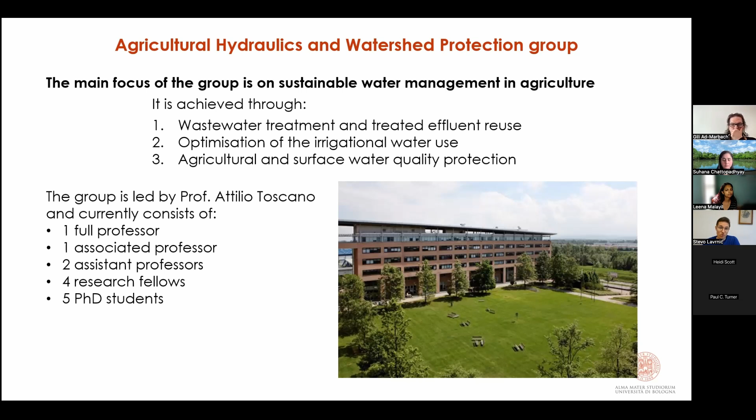So just a brief introduction of the group. We are the Agricultural Hydraulics and Watershed Protection Group. We have different areas that we are focusing on. We are working a lot on wastewater treatment, mostly through nature-based solutions, and reuse of treated effluent. We also deal with the optimization of irrigation water use, and finally water quality protection. The director of the group is Professor Attilio Toscano. It's not a big group, but it's a well-working one. I'm an assistant professor, and I'm working with Professor Toscano on basically most of the projects we have.

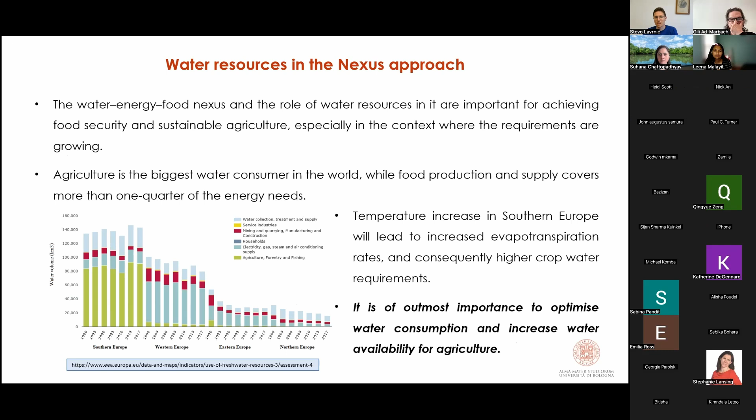Just a brief introduction of the Nexus concept in case you're not familiar with it. Lately, especially in the European Union, the European Commission is pushing a lot on considering the Nexus approach, considering different environmental components that have a role in the management of different areas. In agriculture, it's mostly the water, energy, food Nexus; lately we are adding also ecosystem components. Water, energy, food, and ecosystems are all very interconnected, and we cannot focus only on water or only on food without considering other components. This Nexus approach is crucial to achieve food security and sustainable agricultural production, especially where we have growing demands and low water availability.

We know that agriculture is the biggest consumer of water in the world. It's around 70% at the world level. In Italy, it's a bit lower, around 50%, but in the whole Mediterranean area, so south of Europe, North Africa, Middle East, the average percentage of water used for irrigation is around 80%. So it's quite a big portion.

This is very important in the context of climate change. The Mediterranean area is one of the hot spots for climate change. We have a big temperature increase, leading to increased water losses, mainly through evapotranspiration, and therefore high crop water requirements. We have to supply more water in an area where water is already a scarce resource, and it's becoming even scarcer with climate change. So it is of utmost importance to optimize water consumption and increase water resources available for agriculture.

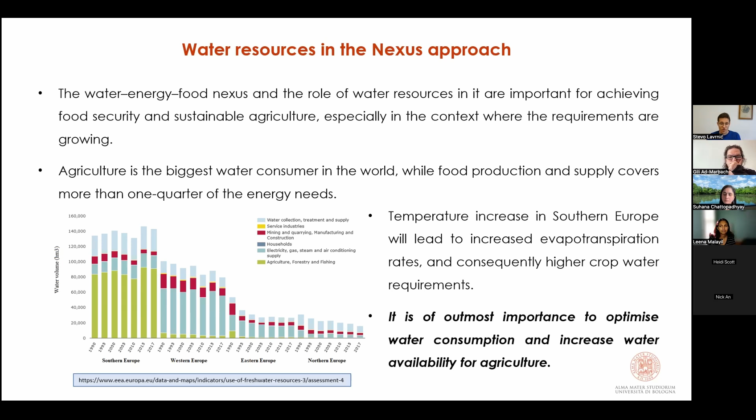In the last years, our group has been working on different areas of water management. We work on optimization and modeling of agricultural water resources, focusing mostly on precision irrigation and the estimation of water needs for agriculture. We have to change the concept. The concept now is to put water, and if we lose some water, it's okay. It's not okay, since we don't have water, so we have to estimate exactly the water requirements in different months of the year based on the crops we are growing. To reduce water consumption, we can also use precision irrigation, giving the crops exactly the amount they need at a given moment.

Since water resources are scarce, we can increase available water through reuse of treated wastewater. Treated wastewater is an important resource. It's available throughout the whole year, and it also has a big added value: the nutrients and different elements present in treated wastewater.

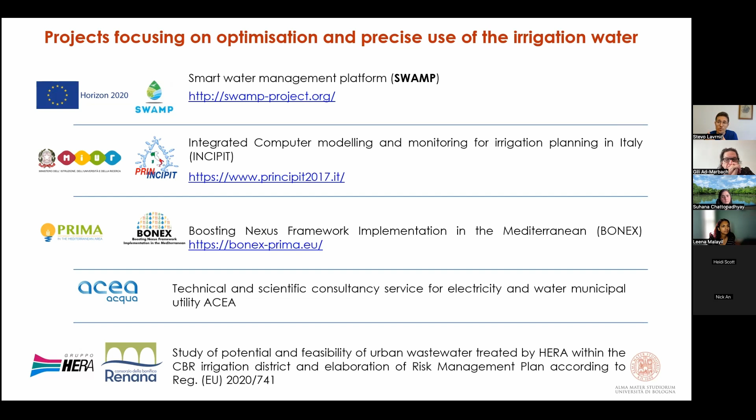So if we start with the first pillar, optimization of the use of irrigation water, as I said, we have to estimate well the amount of water that we will need for crop growing, and we need to reduce water use for agriculture. So one of the projects that is dealing with this topic is SWAMP, Smart Water Management Platform. It was a European project that ended 2 years ago, and it developed an Internet of Things platform that is doing smart water management for precision irrigation in agriculture.

What we did in this project, or what this platform was made to do, is to consider all the data that are important to estimate water requirements for crop production. So we took into consideration different data inputs. The weather is a really important aspect, since it gives us the idea of the rain or the temperature that are influencing water requirements. The platform is also considering soil moisture. That is again an important input in this context. So through all these data sets, the platform is calculating how much water needs to be distributed in different moments.

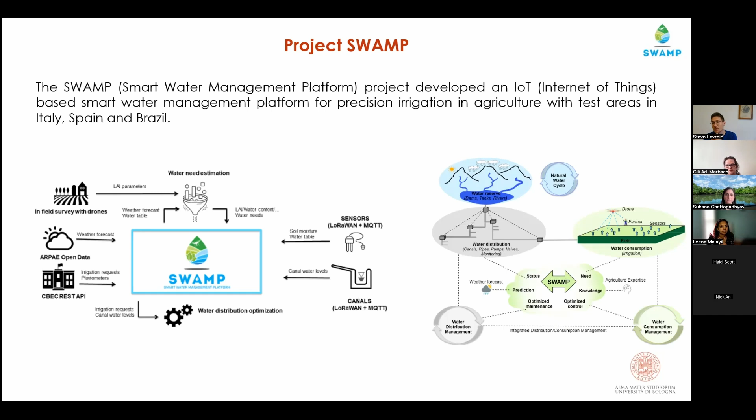The project focused on different test sites in different areas. In Italy, it was near Bologna, where we had a test site. Different sensors were installed to monitor soil moisture, to monitor weather conditions, and to test this platform in the study site.

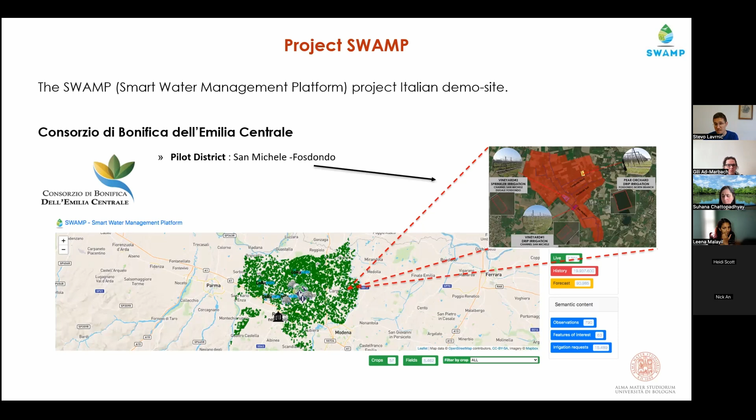Then we have another current project that is Bonex. It's a PRIMA project. PRIMA is a foundation that is focusing on the Mediterranean area. Italy is part of the Mediterranean, so we are working with this project. The focus, the objective of the Bonex project in Italy is to optimize irrigation district water balance in terms of quality and quantity. So we are trying to limit losses in the water distribution system.

So we have a network of surface channels that distribute water to the final users. And we have certain water losses in this distribution network. So we are trying to reduce these losses and to improve water use efficiency. Through reducing losses, we can also reduce freshwater abstraction from surface water bodies. So in the Bologna area, in Emilia-Romagna, that is a region of Italy where Bologna is located, we are taking water from the north of Italy, the Po River, and we have a 120 kilometers long canal that is taking water from the Po to these areas.

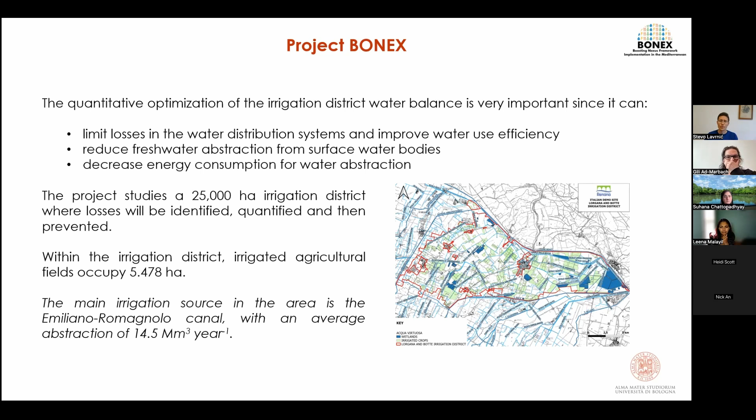So we have to reduce freshwater abstraction, and we have also energy consumption connected to this. We are in the plain, so we have to use pumps to distribute water in different areas, and the use of pumps, of course, consumes a lot of energy. So through reducing freshwater abstraction, through reducing water losses, we are also reducing the energy consumption. In the Bonex project, we are focusing on a 25,000 hectare irrigation district. So it's a big irrigation district where we are studying different aspects.

We are considering different areas of the optimization of water balance. So we are considering the water fluxes to and from the irrigation district. And as I said, we have different specific objectives. So one of them is to reduce losses through evaporation or infiltration from the surface water network, to decrease energy consumption, to assess the effect of nature-based solutions. So in these irrigation districts, we have different nature-based solutions and different wastewater treatment plants that discharge water into the surface water network.

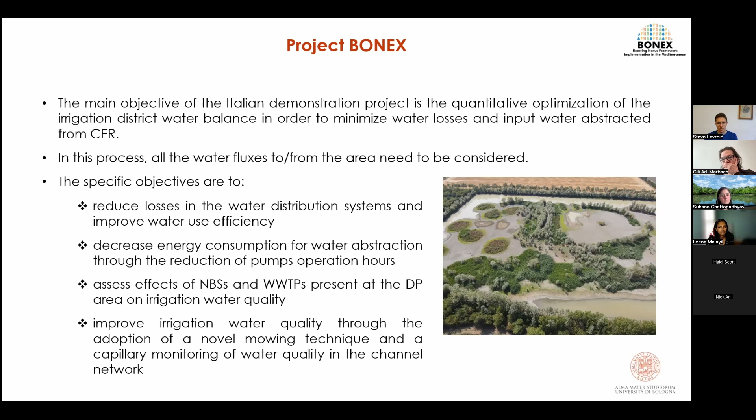And we wanted to assess the effect that these nature-based solutions can have on water quality improvement, and also how treated wastewater discharge influences the irrigation water quality. And we are also considering a novel mowing technique to improve water quality. So basically, we are trying to reduce the rate at which the riparian buffer is being harvested to increase its role for water quality improvement. This is the district that we are focusing on. So as I said, it's almost 25,000 hectares.

In this irrigation water district, we have different water inputs. We have surface water inputs, but we also have, as I said, different wastewater treatment plants that discharge water into the surface water network. So we have indirect water use, but we also have different outputs. Well, to be precise, we have one output from the district.

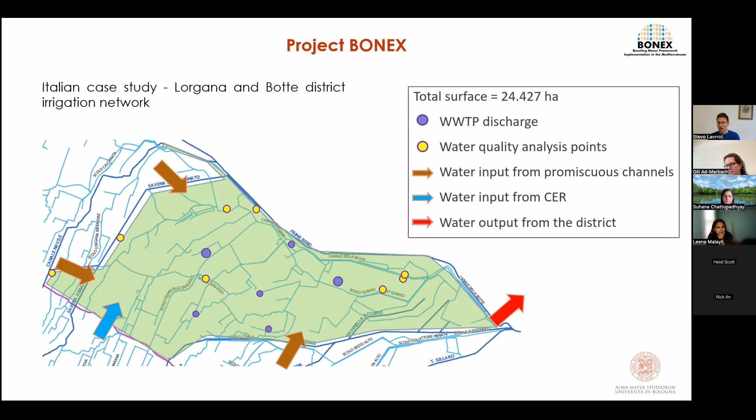If we are considering water balance of the irrigation district, then of course we have to consider different components. So we have to focus on losses through evaporation and infiltration, but then we have to consider also precipitation as an input. We have to consider input from the surface water bodies. We have to consider inflow from wastewater treatment plants. We have to consider irrigation water output.

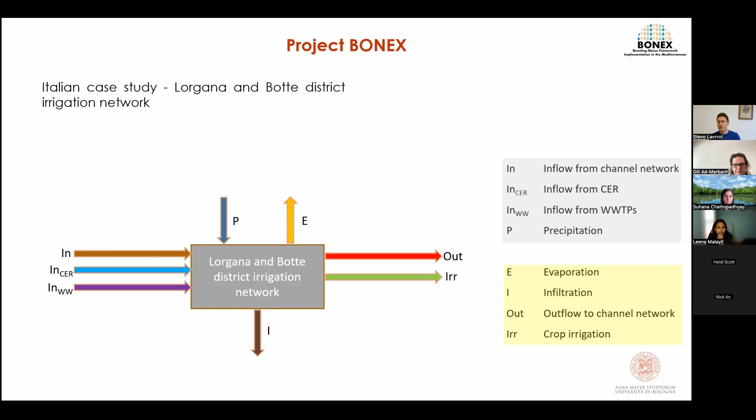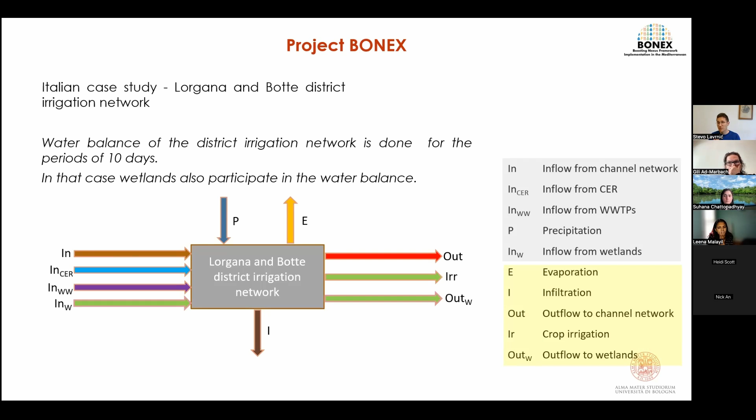And what is curious about this irrigation district is that we have a lot of wetlands. A lot of wetlands that can contribute to improving water quality, but they also consume water. So to be able to close the water balance of the irrigation network, we have to consider all these components.

In the same irrigation district, we are currently doing a study of potential and feasibility for urban wastewater reuse. So we are trying to evaluate what kind of potential treated wastewater has for satisfying irrigation water requirements. So we are assessing different wastewater plants from different points of view. And we are also developing a risk management plan for the treated wastewater reuse.

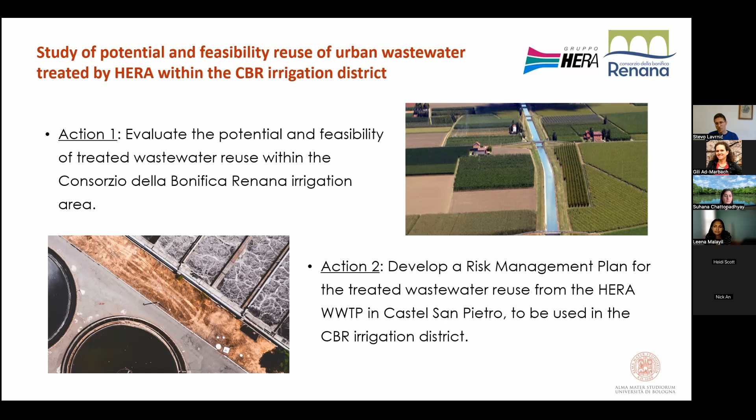I'm not sure if you're aware of that, but in 2020, the European Parliament adopted the new wastewater reuse guidelines. So that is giving clear instructions on how to conduct water reuse in different areas and what kind of minimum quality treated wastewater needs to have to be able to reuse it in agriculture. One of the specific requirements of this European regulation is also to develop a risk management plan for each area where we do water reuse. So we are also doing that in this irrigation district.

This is a bigger area, so 140,000 hectares, of which 90,000 hectares can be irrigated. In this area, we have 31 wastewater treatment plants of different size, of course, that were selected based on their point of discharge, so if they're discharging water inside or near the irrigation district, and we also considered the wastewater treatment plants with a capacity higher than 2,000 population equivalents.

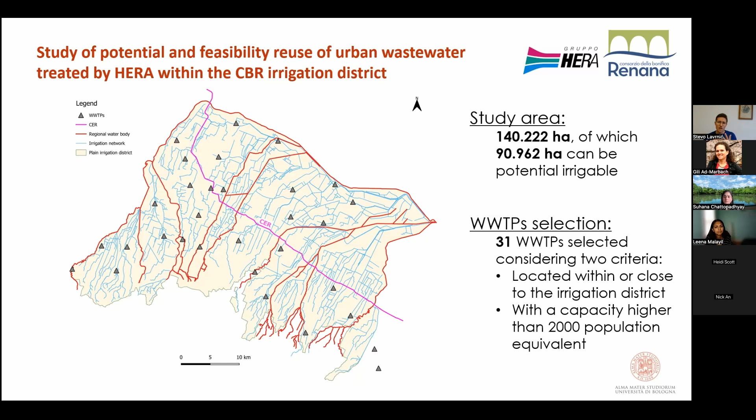So in this area, we have well more than 31 wastewater treatment plants, but some of them are really small, around 1,500 population equivalents. That is, you will agree, really low water volume, so we are not considering them in this study. And we also have some wastewater treatment plants that are currently discharging water outside of the irrigation district, so we are also not considering them. This was the first step of the analysis.

We also evaluated how much this treated wastewater can contribute to irrigation water requirements. And we also classified the treatment plants that are suitable for water reuse. Suitable meaning that it is discharging water near the irrigated areas, suitable in terms of volume, as I said, and especially suitable in terms of treated effluent quality. These treatment plants are working in different ways, so they have different qualities of the effluent.

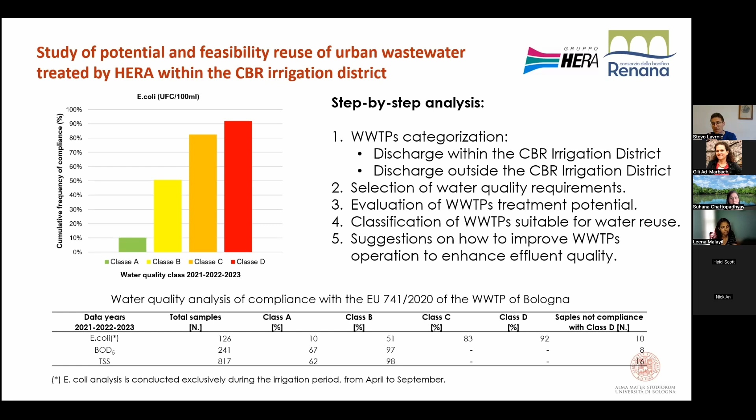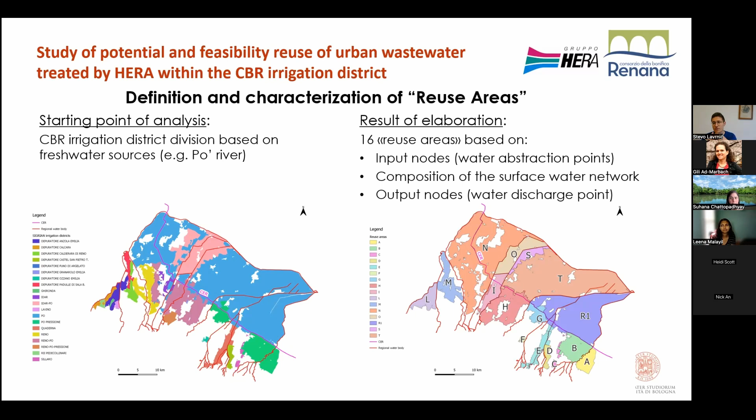According to the new European regulation, we have four classes of treated wastewater. Class A is the best, Class D is the worst, but all of them can be used to irrigate certain crops. In these 140,000 hectares, we defined different reuse areas. In the end, we defined 16 reuse areas that were defined based on their input nodes. So where the water abstraction point is, what is the composition of the surface water network, so how long is it, how well distributed is it, and also where is water discharged from these reuse areas.

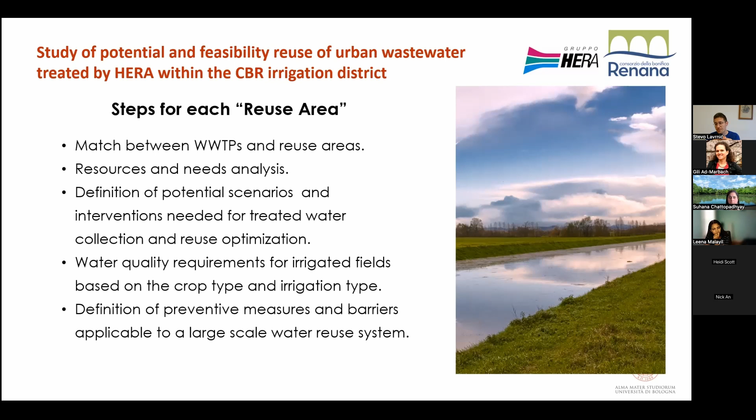Once we defined these reuse areas, we tried to match wastewater treatment plant effluent quality and the requirements of the reuse area. Based on that, we did different potential scenarios. So, for example, we have a wastewater treatment plant that is discharging effluent in the C class, but our reuse area crops need B quality. So how can we match the requirements and the available resources? And we also defined different protective measures and barriers that can be used to increase safety of treated wastewater use.

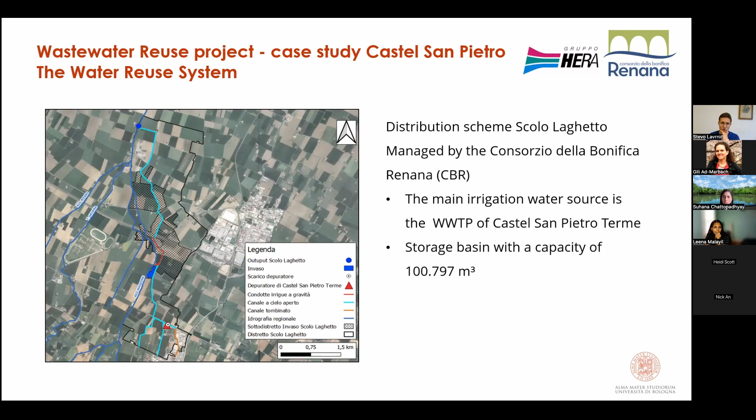We did the risk management plan, as I said, for one of these reuse areas. The particular point of interest for this reuse area is that we have a storage basin. So we also try to see how this storage basin can affect water quality. This is the risk exposure and risk management plan. It's in Italian, I'm sorry, but I will explain it to you.

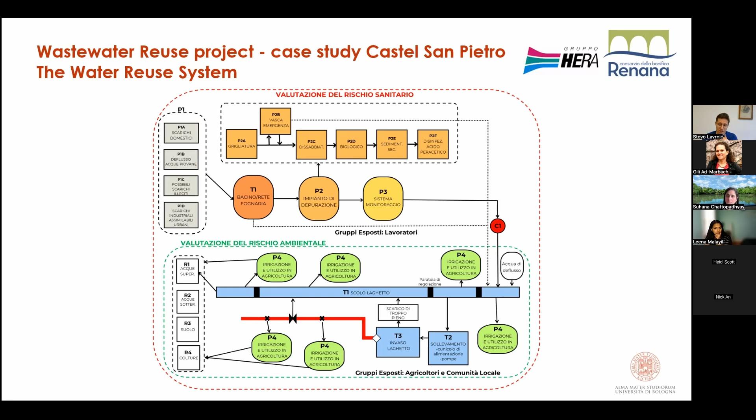So we have different environmental and human health risks. When we consider human risk, we have to be aware of the workers that are working in this area and that can be in contact with treated wastewater. The farmers are of course one of the potential affected groups, but we also have to consider the local community, so bypassers, or the workers that are dealing with water distribution. So we have to consider different areas, different ways they can be exposed, and how their health can be affected.

Also, in this area, we associated water quality class with the needs of irrigated fields. We did the study from 2019 to 2023, and we have data for all these 5 irrigation seasons. So for each season, we studied the surface that was irrigated and what kind of crops were irrigated. Based on the crops that were irrigated, we concluded what kind of treated wastewater quality was necessary to eventually irrigate these crops with treated wastewater.

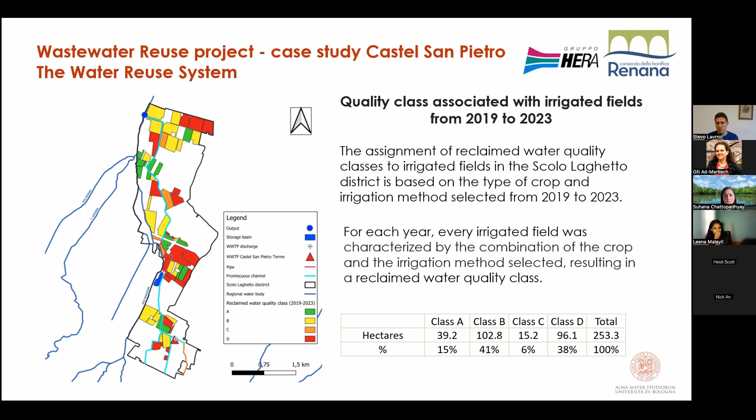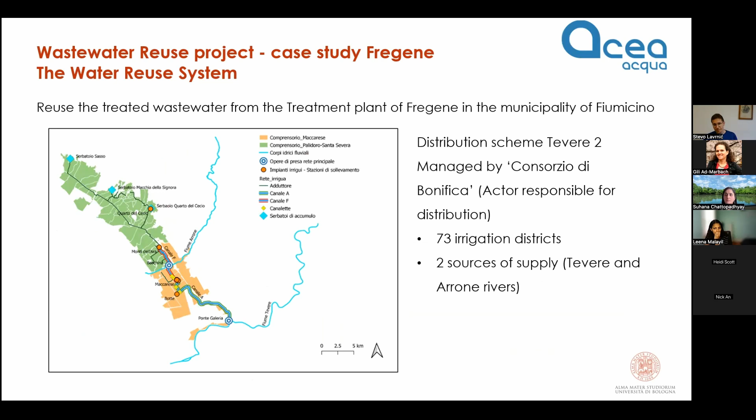We also did risk assessment for a much bigger area. This is near Rome, where we have in total 73 irrigation districts and 2 sources of supply, 2 rivers that were Tevere and Arrone. This is the scheme of the irrigation district where we did this risk assessment.

We have a wastewater treatment plant that is producing treated wastewater. We have different channels that are used to distribute this water, and then we also have different storage basins where this water can be eventually stored and then used afterwards.

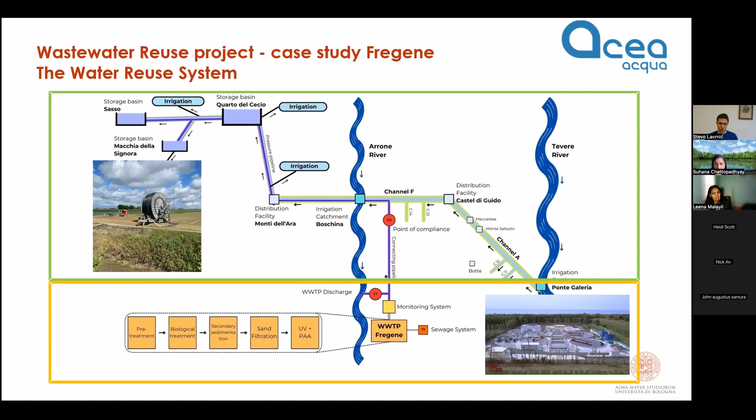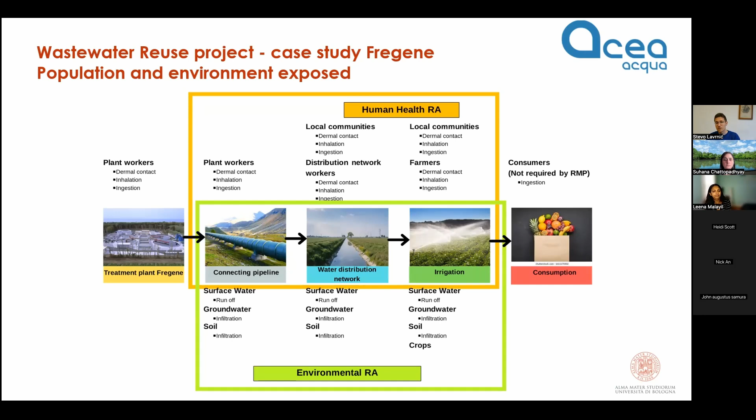We considered for this area two risk assessment matrices. So we dealt with human health risk assessment and environmental risk assessment. When we talk about human health, we have to consider different workers in the area and how they can be exposed. But we also have to consider how the environment can be exposed to treated wastewater, so different environmental components such as surface water, groundwater, and soil. In case the treated wastewater quality is not that good, we have to consider how it can affect these environmental matrices.

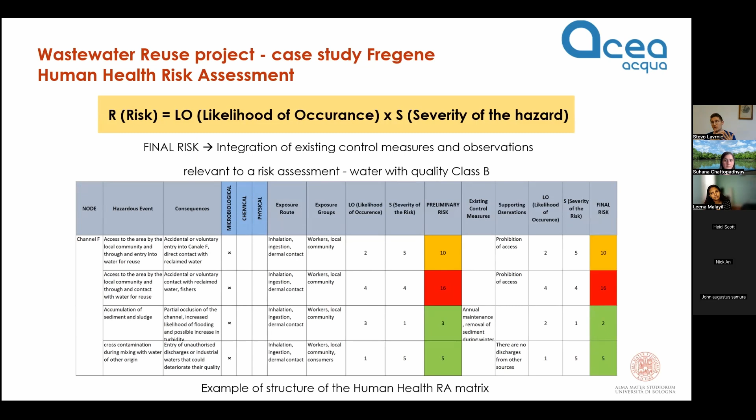For each reuse area, we assessed different hazardous events that can occur, what kind of consequences they have, but we also considered calculated risk based on the likelihood of occurrence and severity of the hazard. So likelihood of occurrence is how likely this hazard is to happen, and the severity is of course how important the consequences can be. Based on that, we calculated the final risk.

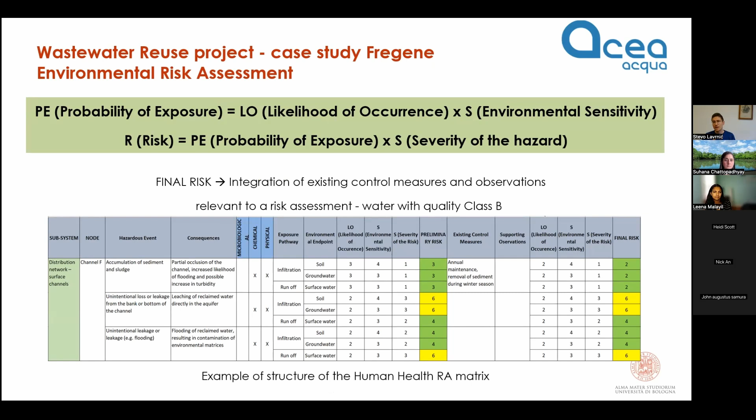When we talk about environmental risk assessment, we have to consider another variable, that is environmental sensitivity, or in other words, how environmental components that we consider can react to different ways of pollution.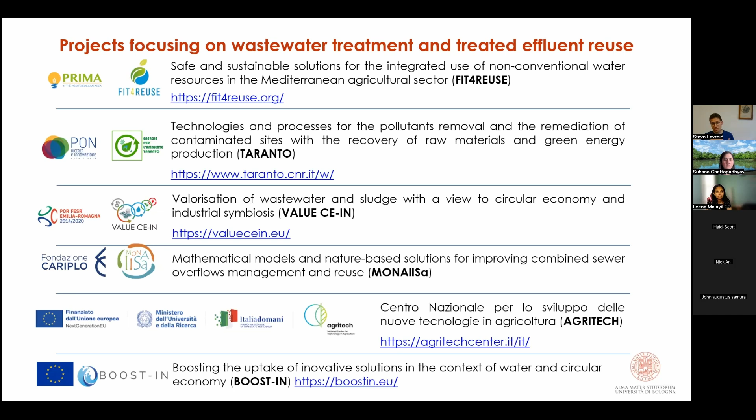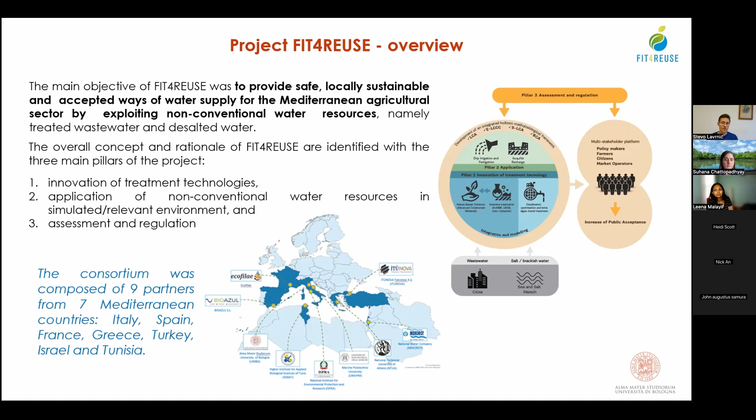If we move now to wastewater treatment and effluent reuse, also in this kind of topic we have different projects. Fit for Reuse was a big project that we had. It finished 3 years ago. The main objective of this project was to provide safe, locally sustainable, and accepted ways of water supply for the agricultural sector by exploiting non-conventional water resources. When we talk about non-conventional water resources, we consider treated wastewater and saline water. So in this project, we focused on different treatment technologies, how the use of these non-conventional water resources can affect agricultural production, and finally what kind of regulation we have in this area.

So we had different pilot plants that were used for the treatment and quality improvement of non-conventional water resources. We developed a simulation platform that was predicting performances of different technologies for the treatment and how they can react in the conditions that we have not tested them in.

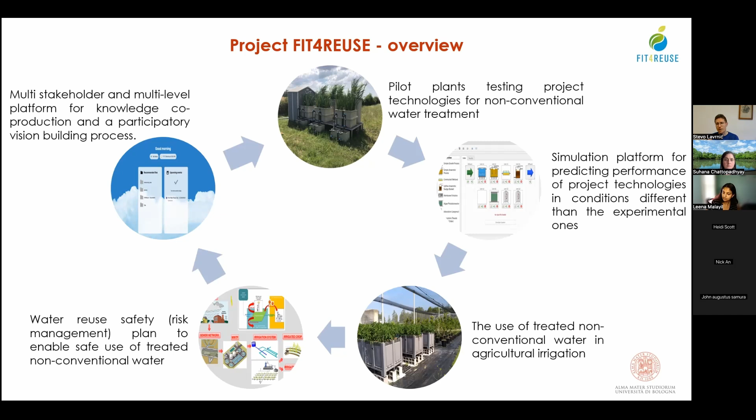Then we did tests with treated water used for irrigation to see what kind of effect it has. We worked also on risk management, as I said before, and we dealt also with the stakeholders. So we developed a platform that can be used to connect different types of stakeholders and to collect their opinions on the topic.

We dealt a lot with nature-based solutions, constructed wetlands. You see a small pilot plant near Bologna that we had, that aimed to test different kinds of constructed wetlands to improve the quality of wastewater.

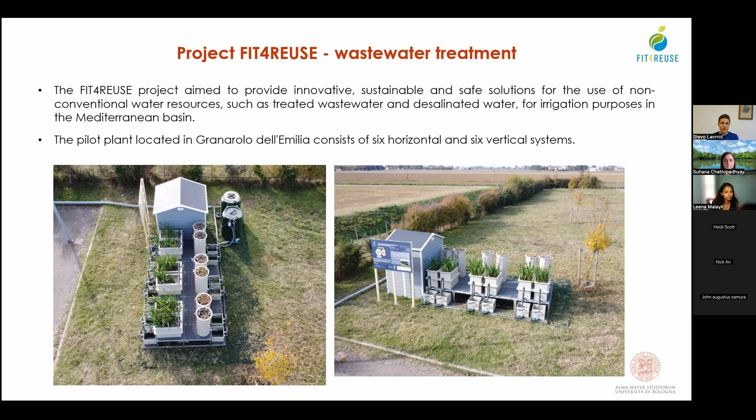Domestic wastewater. We considered different substrates, different combinations of the treatment units, and different operating parameters. So, for example, hydraulic loading rate and hydraulic retention time, which are very important when we talk about constructed wetland performance.

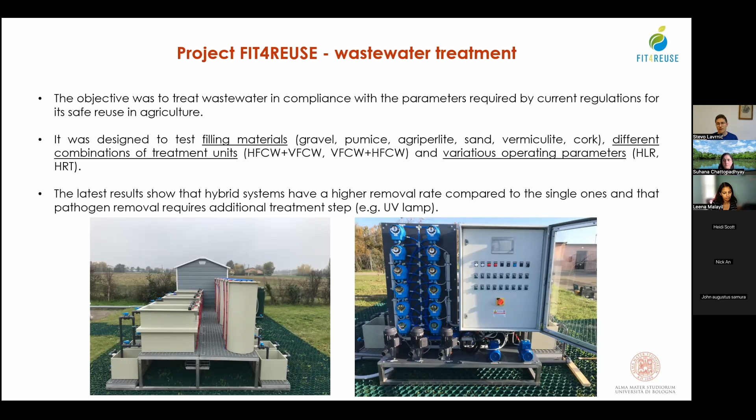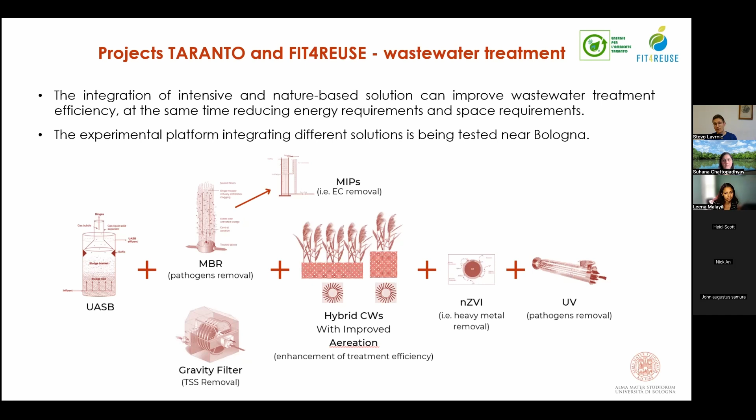We also tried integrating constructed wetlands with intensive solutions, for example, upflow anaerobic sludge blanket or the membrane bioreactor. So we try to integrate different solutions to improve performance, to achieve better quality of effluent, but also to lower the environmental footprint of these technologies.

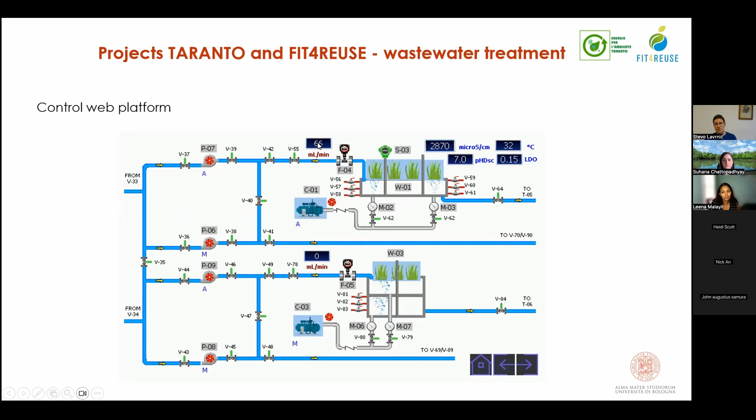You can see here the web platform that we developed to be able to monitor the pilot plant remotely. Different pumps that, so basically we can click here on different pumps to see how they're working, to turn them on, turn them off. We can change their water flow and so on.

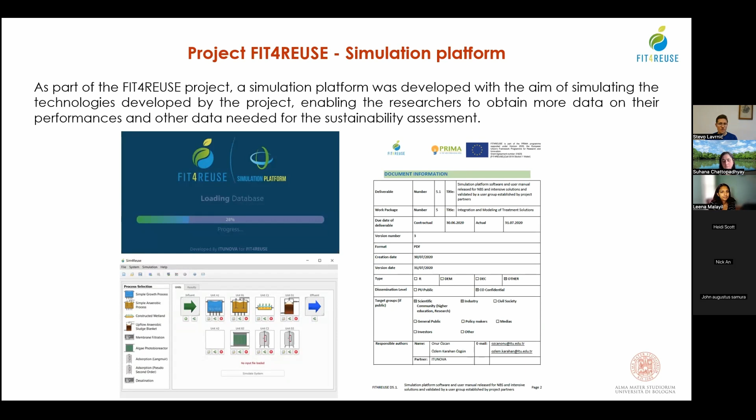The simulation platform that I talked about is trying to simulate the performance of different treatment solutions. We tested different treatment solutions, but of course we didn't test them in different environments. So this negative aspect was overcome by development of the simulation platform, where we could combine different treatment trains to see how they can perform in different areas.

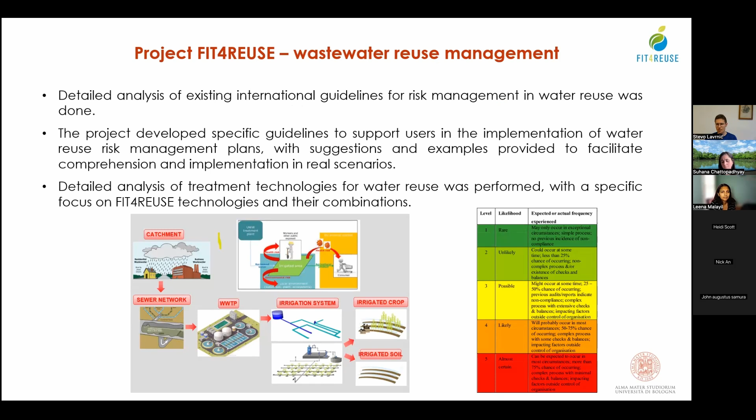We developed risk management for different areas that were considered in the FIT4REUSE project. I already talked about risk management, so I won't go into it again.

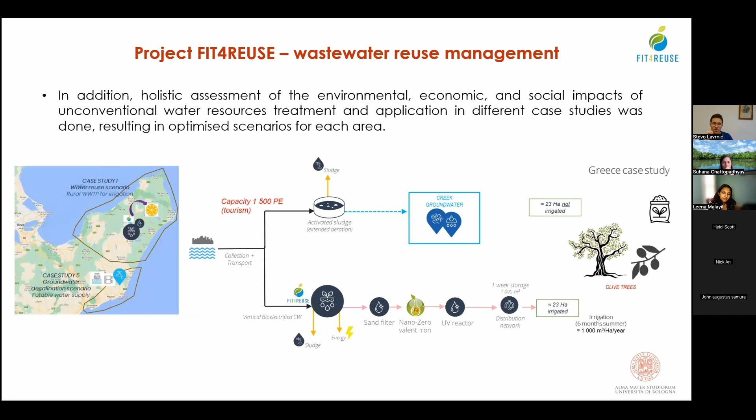I don't want to spend a lot of time on this topic, but we have different case studies. Here you can see, for example, a case study in Greece, where olive trees were irrigated with treated wastewater. So we considered different risks that can occur in that practice.

Public consensus is really important when we talk about reuse of treated wastewater. We all know about the yuck factor, for example. So we try to use the concept of citizen science and citizen sensing to improve public opinion on water reuse.

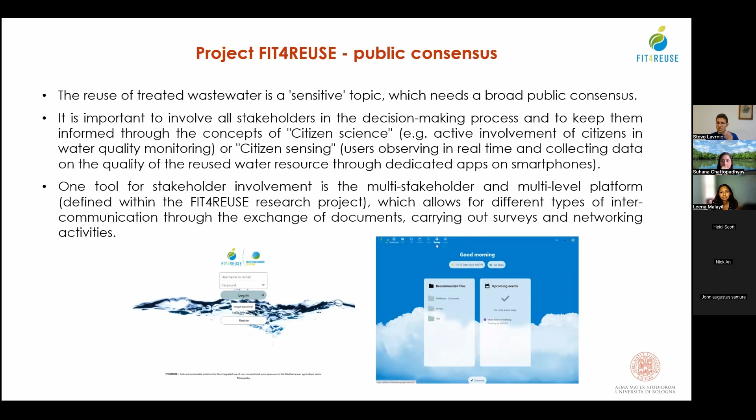One of the tools we used for that was a multi-stakeholder platform that was used to connect different stakeholders. We also did different events. In our experience, it's really important to organize round tables or webinars where we can give the public the right information at the right time about treated water use.

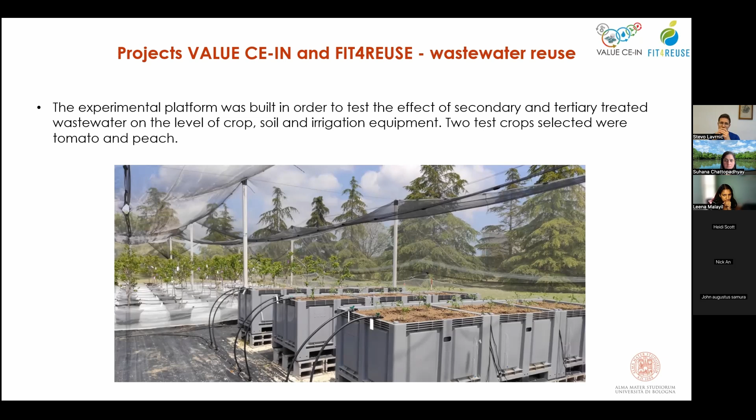We also developed an experimental platform near Bologna, where we did irrigation with secondary and tertiary treated wastewater to see what kind of effects they had. We irrigated tomato and peach. Peach was irrigated with secondary treated wastewater. Tomatoes, since they are more sensitive crops, were irrigated with tertiary treated wastewater.

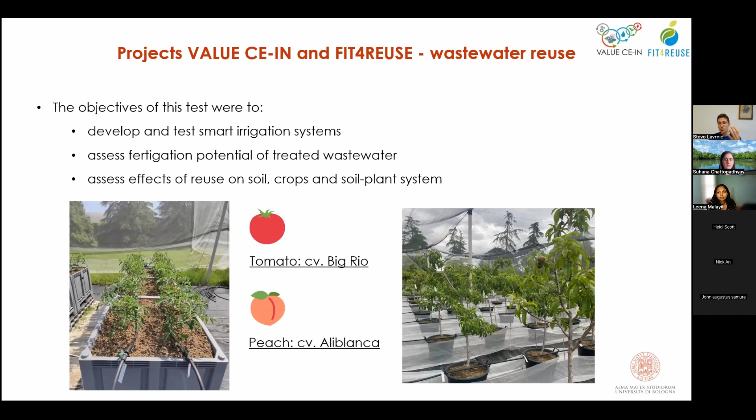The objective of this trial was to develop irrigation systems that can be used for irrigation with treated wastewater. We also wanted to assess the fertigation potential of treated wastewater, to see how much of crop nutrient needs can be satisfied through the concentration of nutrients present in treated wastewater. And we used this platform to assess the effects that water reuse can have on soil, crops, and the whole soil-plant system.

In this platform, we could monitor the nutrient needs in real time and the nutrients provided to the crops through irrigation water. So we considered the concentration of nutrients in irrigation water. The platform was able to calculate how much nutrients these crops need, and the remaining part was added through special pumps and algorithm calculation.

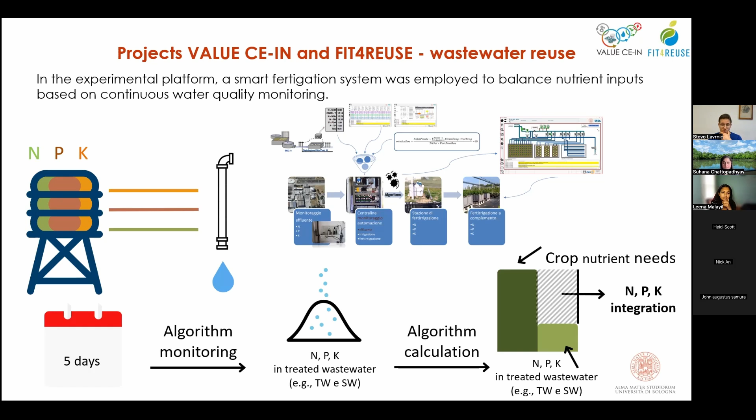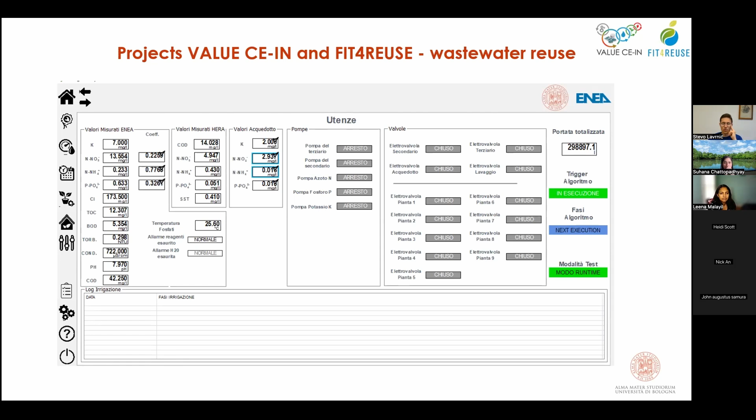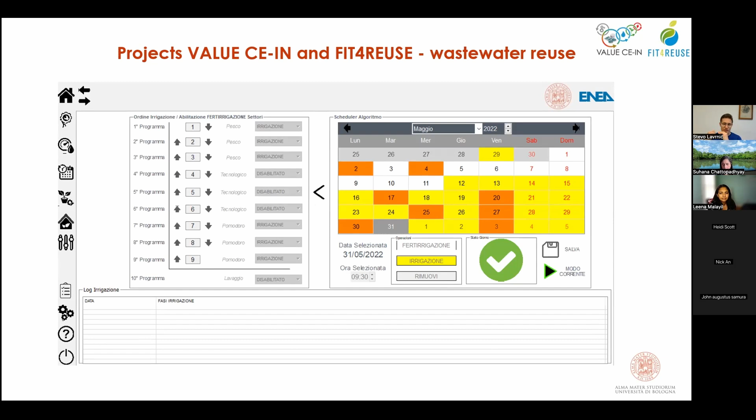We also have a platform to deal with this experimental site remotely. We can see different water quality data to be able to calculate how much nutrients we need to add. We have this nice calendar where we can select the days when we want to do only irrigation or irrigation with fertigation, adding nutrients through fertilizers.

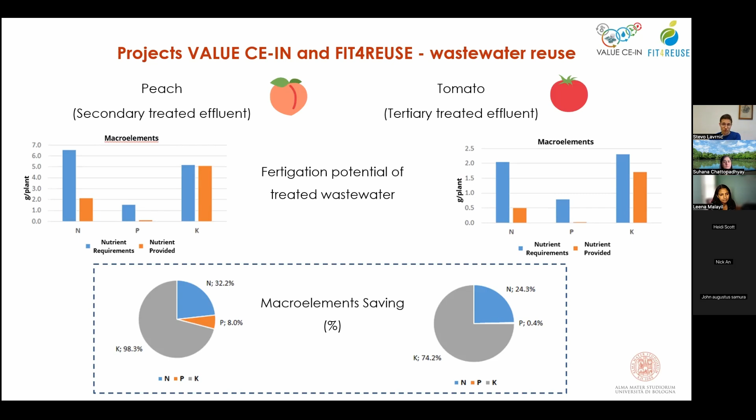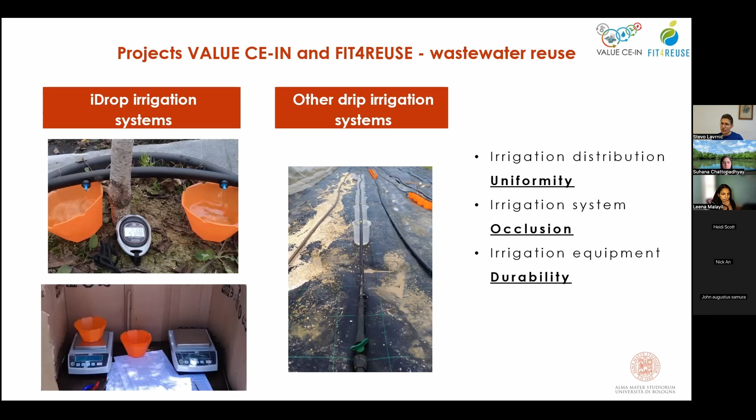We also tested different irrigation systems. Basically, treated wastewater can contribute to development of biofilm in irrigation drippers. So we tested these effects through assessment of the uniformity of distribution of irrigation water.

We are trying to consider also contaminants of emerging concern that can be present in reclaimed water, and to see what kind of effects they can have on crops or soil. This is a relatively new part, so we are developing methodology for this kind of assessment.

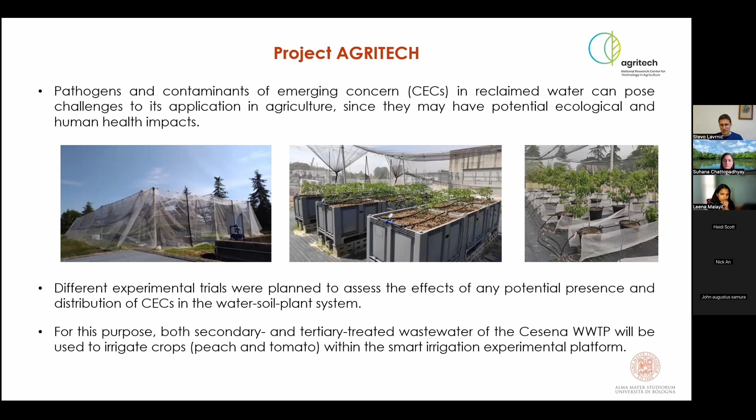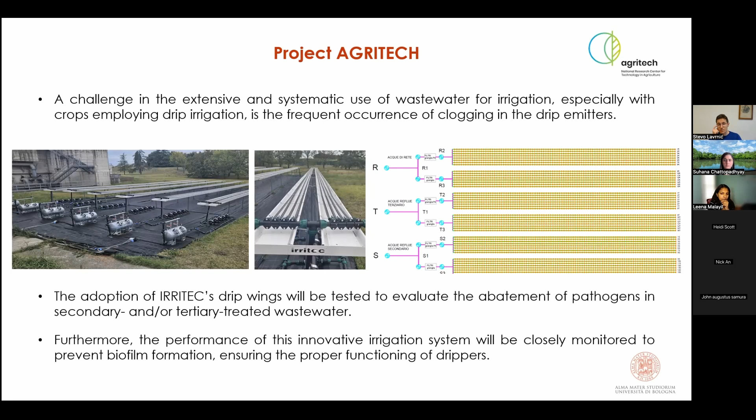We are testing different kinds of irrigation drippers and emitters to see how they can resist eventual biofilm formation that can be caused by use of treated wastewater for irrigation.

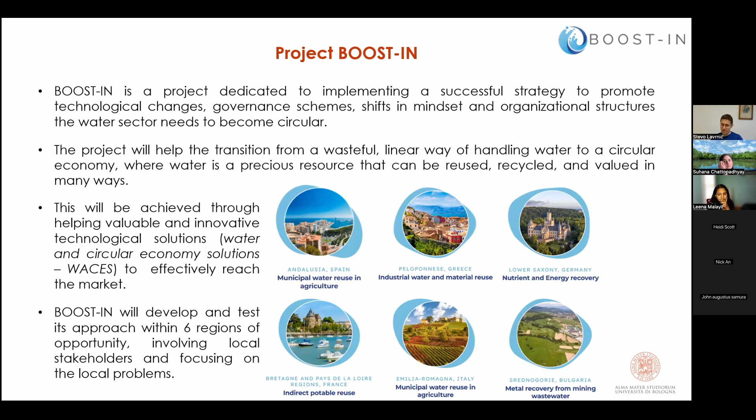We also have a relatively new project called BOOST-IN that is trying to implement a successful strategy to promote water use in different European countries. For example, in Spain and Italy, we are focusing on domestic wastewater use in agriculture. In Greece, it's industrial water use, while in Bulgaria, for example, it's mining wastewater recovering and use. In Italy, we are focusing on the Emilia-Romagna region where Bologna is located. Emilia-Romagna is a really important agricultural production spot, producing almost 16% of the whole Italian agriculture export.

Agriculture is a very important sector for Emilia-Romagna. So we are trying to identify different water solutions for the circular economy to promote wastewater use and to increase knowledge on water use among different stakeholders.

Finally, focusing on water quality improvement. As I said, agricultural production can affect water quality in negative ways, so we developed different solutions to deal with this potential agricultural pollution. We have the project FarmWise, a European project currently running that aims to transform the European agriculture sector by implementing different solutions, also focusing on artificial intelligence.

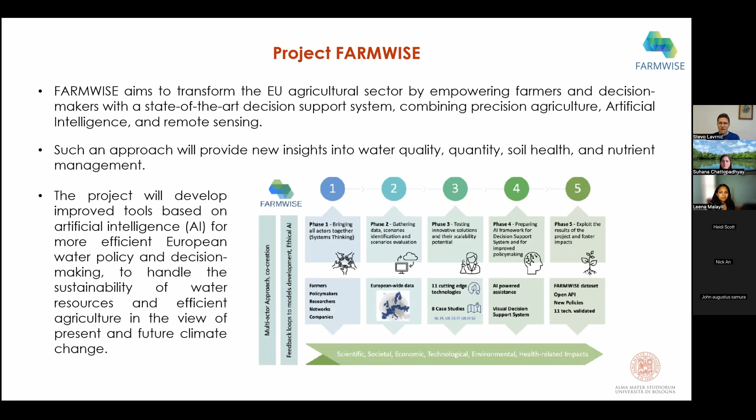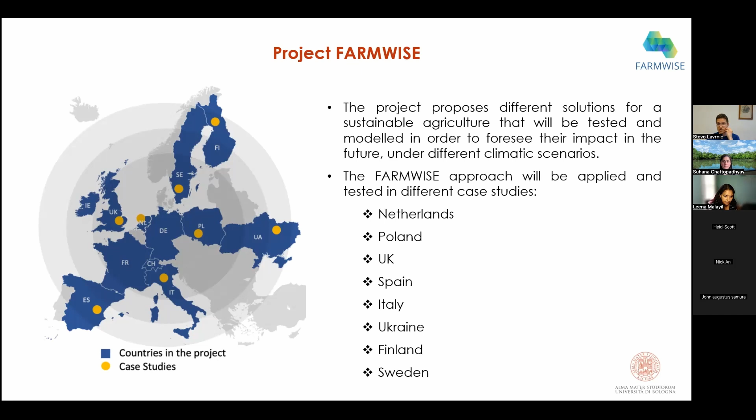In FarmWise, we are a very big consortium, with different European countries from Italy to Spain to Sweden, Poland, and so on. We have different test sites in these countries. The Italian site is located near Bologna, where we are focusing on sensors, low-cost sensors for measuring water contamination.

These sensors are really low cost and simple to use, so we believe they can also be used for citizen science promotion.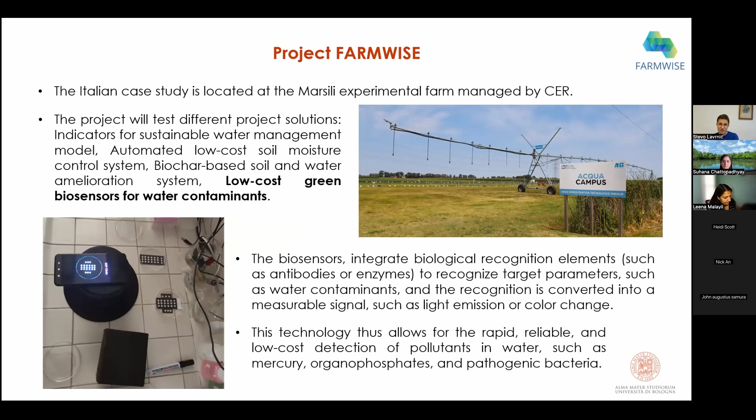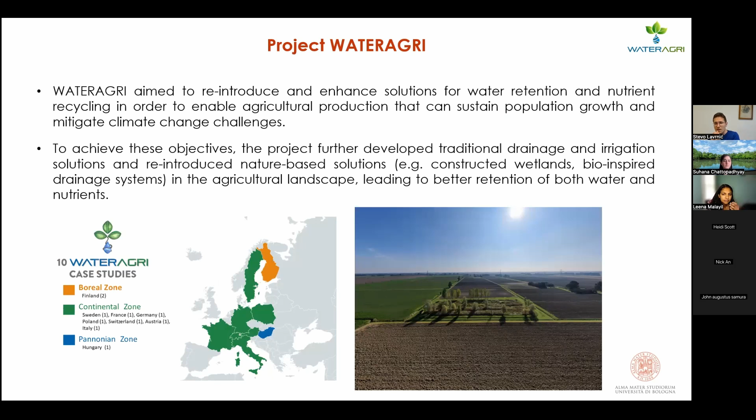The WATERAGRI project is a similar European project that is trying to introduce solutions that can be used for water retention and nutrient recycling in agriculture, to make agricultural production more sustainable.

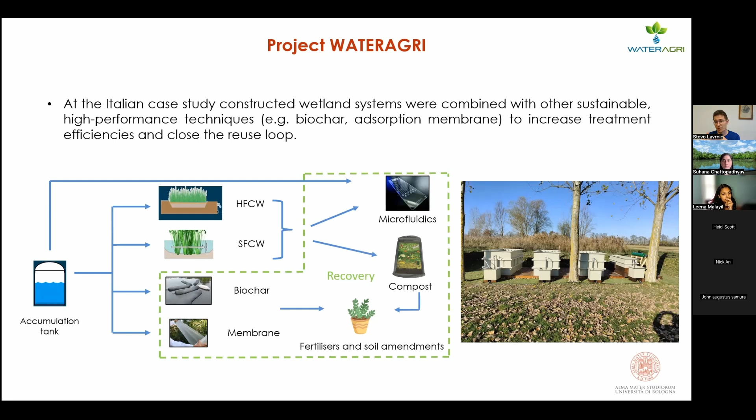What we did in this project: we tested different kinds of constructed wetlands to improve water quality. And to close the circular approach, we also recovered the biomass from constructed wetlands to see if it can be used to produce compost that can later be used for agricultural production. We focused on different types of constructed wetlands, such as horizontal flow and surface flow, that can have different benefits for water quality improvement.

We also considered biochar. Biochar, as we know, is an organic material that can be used to absorb nutrients from water, and since it's organic material, it can be degraded and used as a soil amendment.

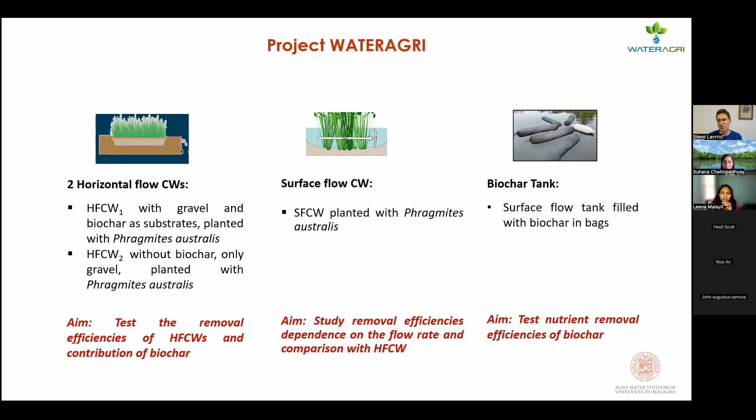These and other experiments we are doing in the Marsili experimental platform near Bologna, a 12.5 hectare agricultural farm, and we are focusing mostly on the constructed wetland there.

It's a full-scale constructed wetland on this farm that is being used to treat drainage water, agricultural drainage water. It's a full-scale system, as I said.

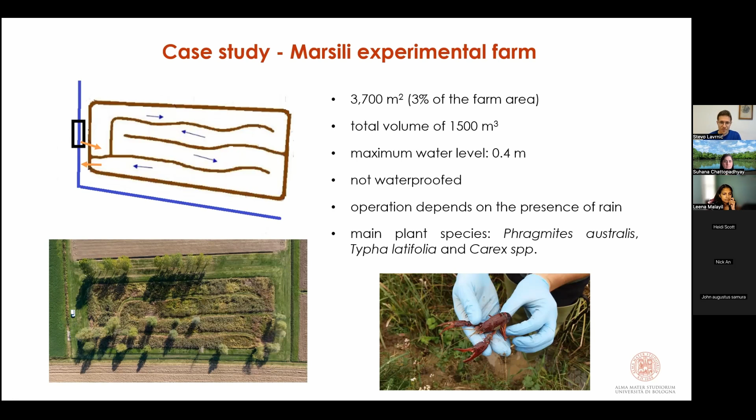How this system is functioning: here with the blue arrow, we have the drainage channel that is collecting drainage water from the farm.

In the black square, we have two pumps that are used to pump water inside the system. These pumps take water from the channel and send it directly to the constructed wetland.

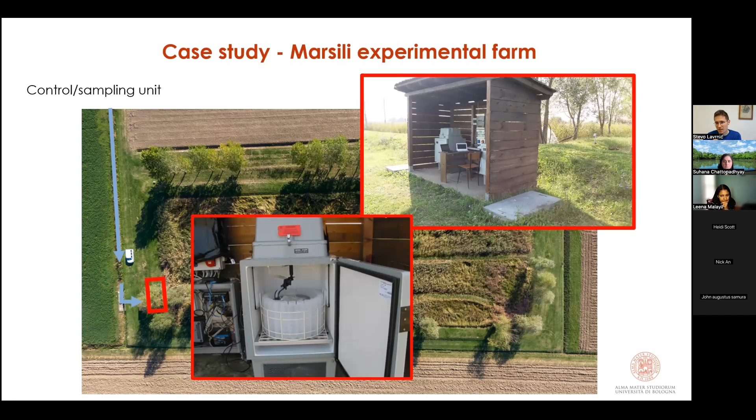The constructed wetland has a central control unit that can monitor different parameters, but it can also take samples of inflow and outflow water, so that we can analyze this water for water quality.

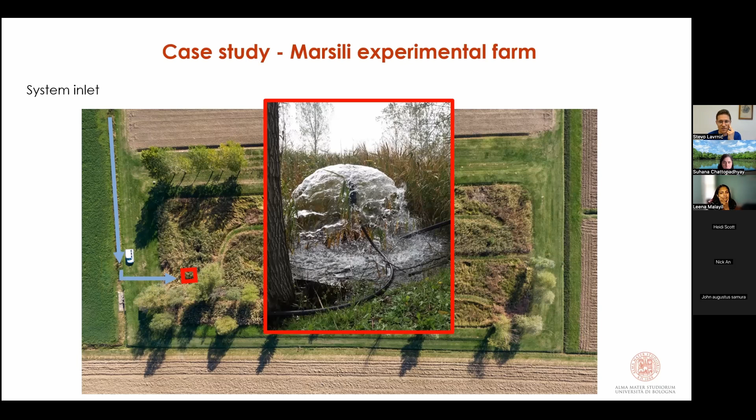This is the inflow into the system, so it's like a fountain. It's really nice when it's functioning at full capacity. Then we have four meanders, so the water follows this path, and finally we have the water outlet through gravity.

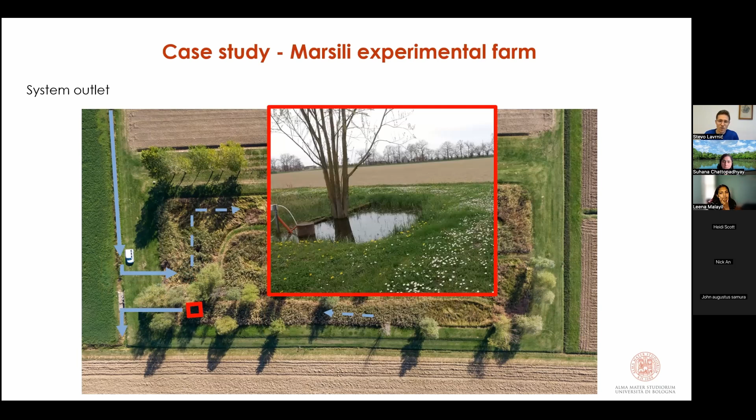We have been doing experiments with this system for more than 10 years. In particular, we analyzed 2 years, 2018 and 2019, specifically to see how the system functioned.

You can see different water quality parameters and how the system was operating. It could remove around 50% of chemical oxygen demand from the inflow water, and about 70% of suspended solids, nutrients, and so on. So we are sure that this system is functioning well.

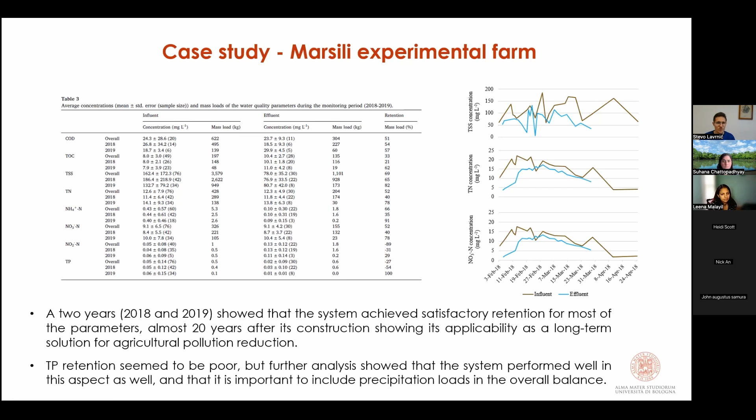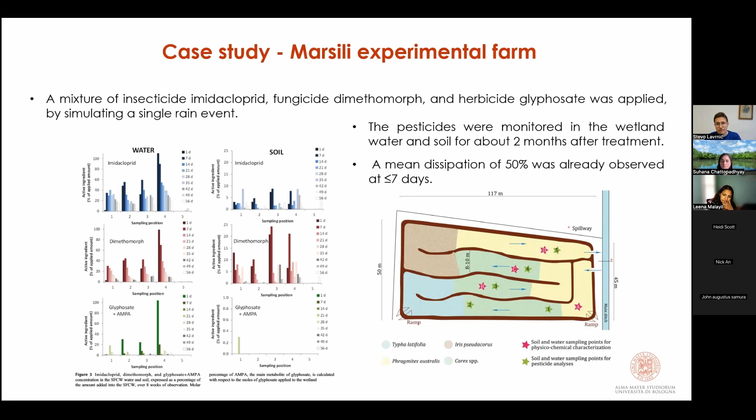We also tested this system for removal of different pesticides, to see how the system can deal with emerging contaminants. We received really nice results from this study as well. Basically, we observed a mean dissipation of 50% in less than 7 days.

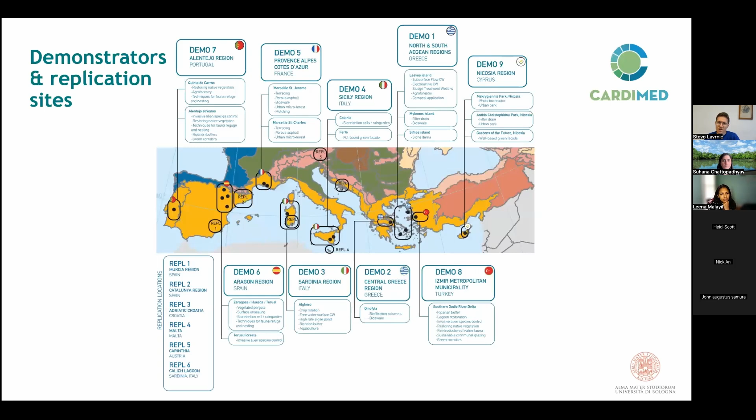Finally, we have the CARDIMED project that is currently running. It's focusing on the Mediterranean area again through different pillars, with different demonstration sites. In Italy, we have a demonstration site on the island of Sardinia.

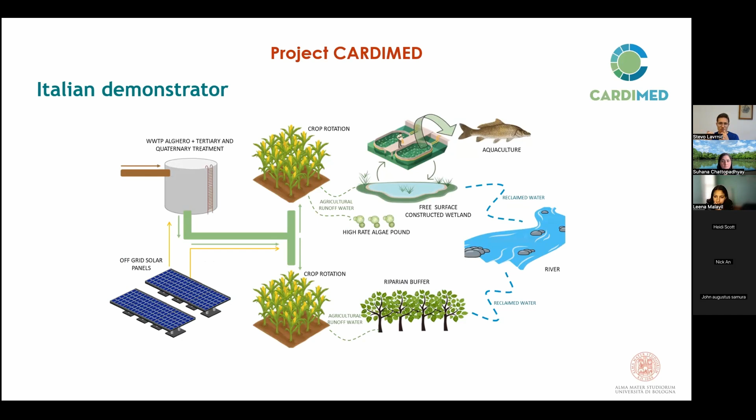There, we are focusing on different agriculture solutions: crop rotation, riparian buffers to improve water quality, constructed wetlands, and so on. It's a 4 hectare farm where we are applying different solutions to improve the sustainability of agricultural production.

In conclusion, we can say that the water sector needs to be more resilient since we have climate change and its negative effects. But we also have anthropic pollution that is lowering the sustainability of agricultural production. Digitalization is one of the key issues, so we need to apply new digital tools and artificial intelligence to improve the sustainability of the agricultural sector.

Of course, all these solutions that we can develop and apply are nothing without stakeholder acceptance. So we have to involve stakeholders in each step of the way, to ensure that the solutions we are developing can be used to satisfy their needs.

All these aspects are also considered in the Green Deal of the European Union. I'm not sure if you're aware of it, but the European Commission and its President von der Leyen introduced this Green Deal, which is trying to make Europe carbon neutral by 2050. It has a series of different topics, and one of them is sustainable agricultural production and healthy water resources in Europe.